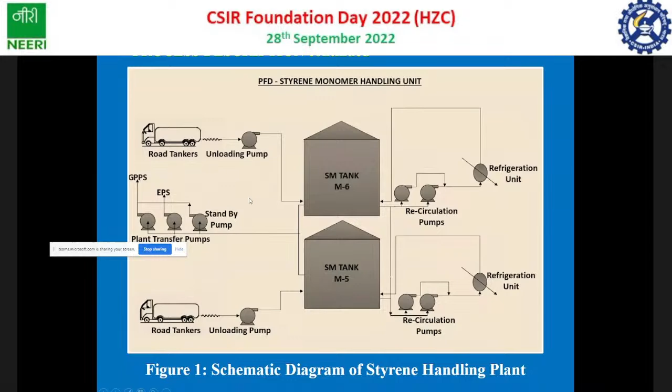Circulating pumps from the unit are located beside the tank. From the tank, styrene was being pumped to produce general purpose polystyrene and expanded polystyrene. That is the picture of the styrene handling unit.

Now let us see the top of the M6 tank through its two vents, where the vapor release happened. One is an 8-inch vent - that's the first one. The second one is at the center; it is a vent originally designed as a flame arrestor, but it was being operated as a vent also. So there was an opening of 10 inches in the form of two vents.

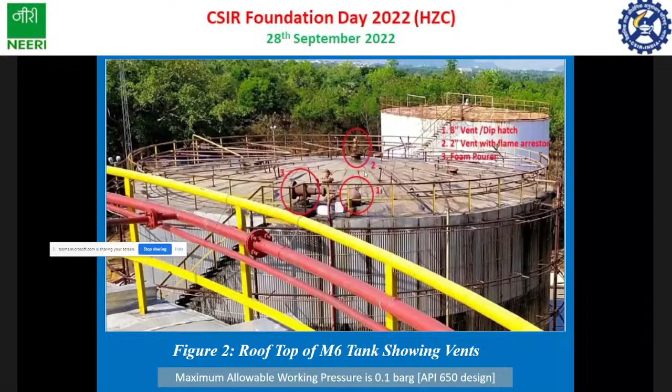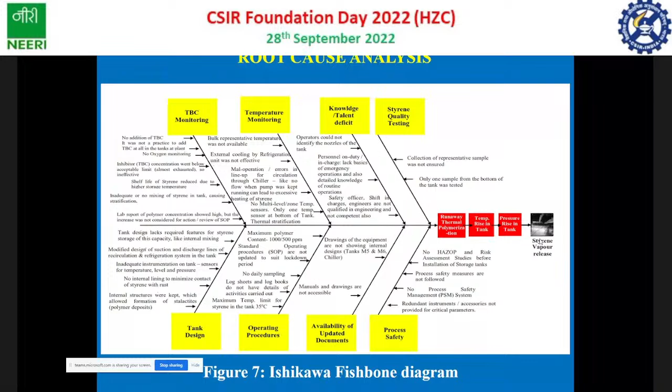Had it been adiabatic, then definitely the accident could have been huge, and the loss could have been huge. Luckily there were 2 vents, and they were enough to release the styrene.

So there are 8 major points we identified that influenced the increase of temperature of styrene in the tank. Those are tank design, tank temperature measurement and control, TBC monitoring, operating procedures, availability of updated documents, knowledge or talent deficit, styrene quality testing, and process safety management.

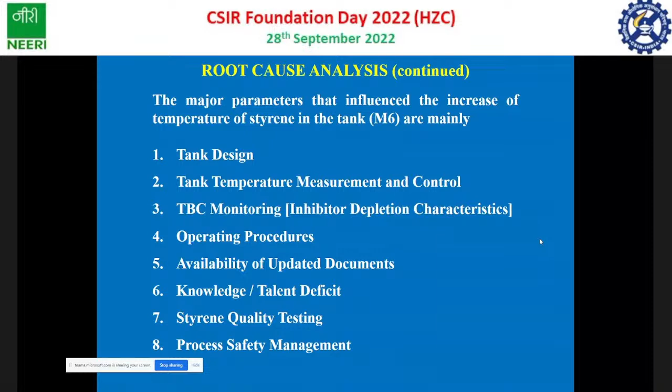Everything affected. All these parameters in detail we can go through.

Then we have the figure. This is one of the oldest figures I have seen. It is not exactly an engineering diagram, but a general figure, though there are several nozzles. It is one of the oldest because at the time of alcohol manufacture, this tank was fabricated for molasses storage. Later it was converted for storing styrene.

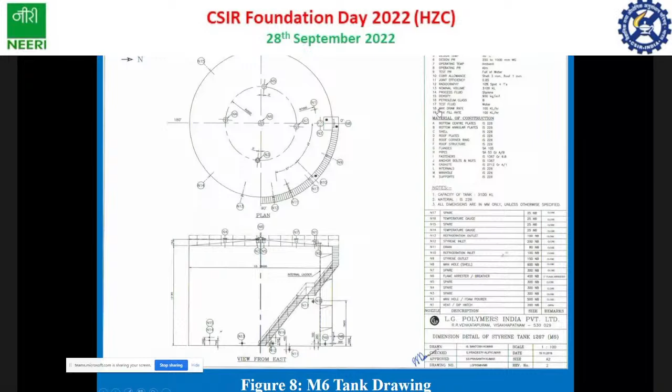So there were 17 nozzles. I told you about the flame arrestor, and I have shown the dip hatch as vents.

Another disadvantage of this tank that promoted the formation of polymer content was the conical roof on an inside structure. Actually it should be outside the structure. Modern designs won't permit having the inside structure. Then it was provided with a recirculatory cooling system.

Then the major thing happened, which was the change of design in the suction and discharge, as you see here. Originally it was having a swing pipe with float, such that the whole liquid, while being sucked, could be mixed.

The cold liquid, actually this diagram is reversed, coming from the refrigeration system, enters at the bottom, because bottom contents are taken for processing. So what they did, they faced some problems with the float, so they removed the float, and everything is now restricted to the bottom.

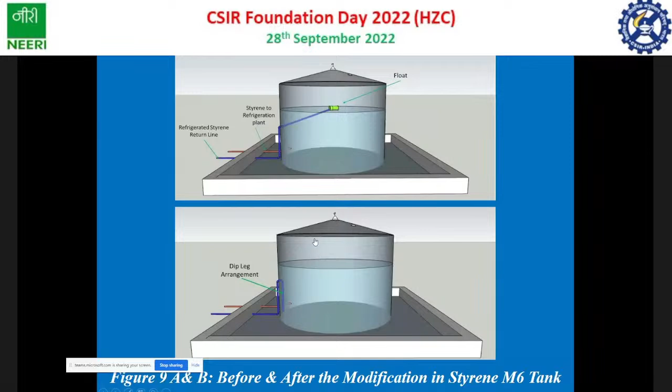So the remaining liquid happened to be stagnant. Because of this, the temperature of the styrene in the tank was not uniform, except the bottom zone. The top and middle zones were exposed to sun heat, and the temperatures went up during the corona period.

Otherwise, they were taking styrene from the shore tanks, and with a residence time of 1 or 2 days, it was moving to process plants.

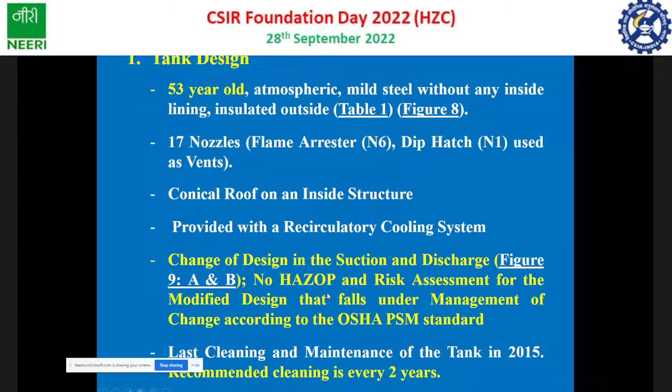The last cleaning and maintenance of the tank was in 2015. Recommended cleaning is every 2 years.

When we come to understand tank temperature measurement and control, there was a single temperature measuring probe at the bottom of the tank. At least 3 probes at different locations must be the minimum.

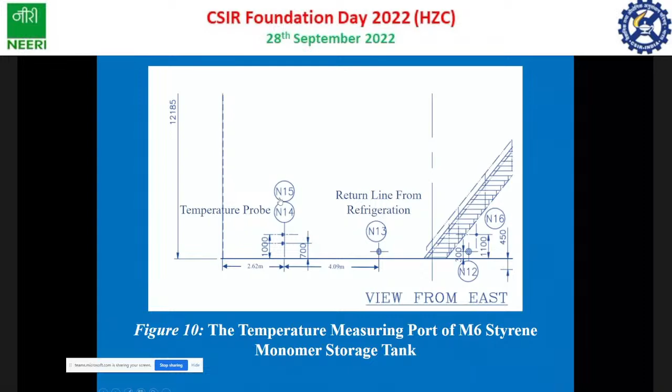So you look at the probe that is nearer to the wall, and it is not a representative actual temperature. Only bottom zone temperature was being measured; temperature measurement was restricted to the bottom zone. Top and middle zones might have had different temperatures that they never thought of when they changed the design in the suction line and discharge line from the refrigeration unit.

So there was thermal stratification of the tank. As you see here, with good mixing you have 17 degrees centigrade. Otherwise, thermal stratification occurs: above you have 35.2 degrees at the top layers, but only 17 degrees at the bottom.

The maximum temperature protocol of LG Polymers was 35 degrees, when we inquired with other companies it was far, far less. So the protocol itself actually created some problems, particularly when storage was for a longer time.

Tank top temperature was estimated at 41.7 degrees from DCS level percentage data, recorded on 28/4/2020, exactly 9 or 10 days before the accident occurred. This reflects the incorrect assumption of bottom temperature as the bulk temperature of the tank.

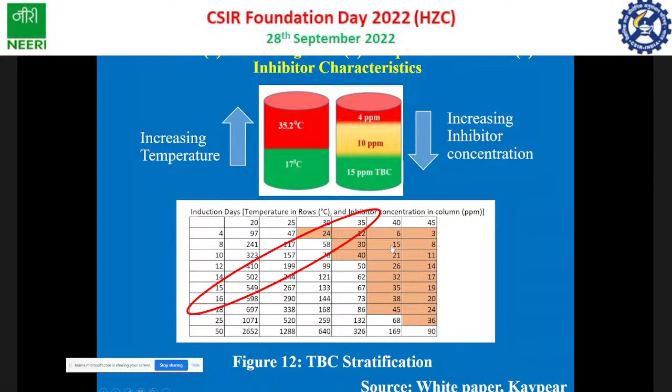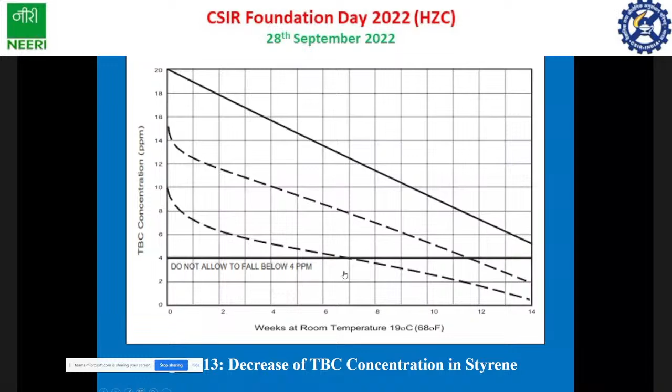Then there was decrease of TBC concentration in the styrene, because they did not know the inhibitor depletion characteristics. Look here at the diagram: it should not cross 4 ppm. I've shown you a figure where the top layer of styrene must have reached 4 ppm or even less.

Then mixing was not there, and they did not have any measurement facility for oxygen levels, so we could not find out the oxygen levels. If oxygen is less than a certain ppm, even maintaining 15.6 degrees centigrade, it will stay stable only up to 10 to 15 days. At 30 degrees, only 4 to 5 days.

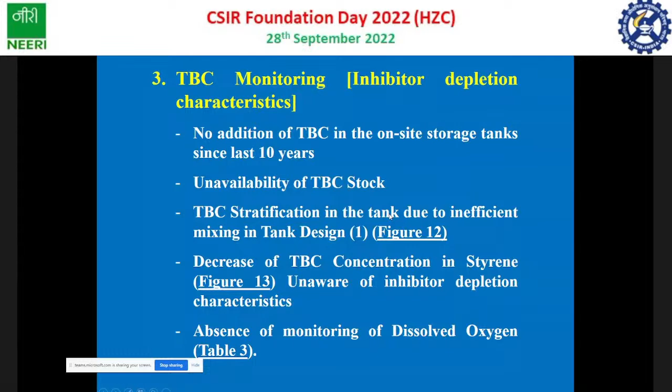Then, what are the lessons learned for tank design, temperature measurement and control, and TBC monitoring? These are the first major points. You'll see here, the tank should have this kind of design. The earlier design was good, but they changed it without thinking of the consequences.

You will see this suction pipe, called the swing pipe. It moves up while pumping and comes down, so all the liquid at various levels is recirculated through the refrigeration unit. So this kind of tank design is necessary, it should go back to that.

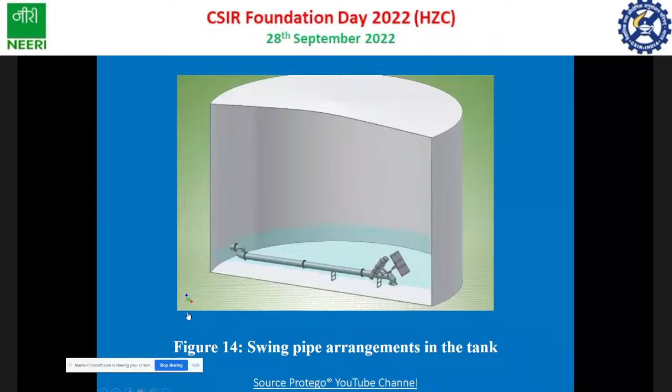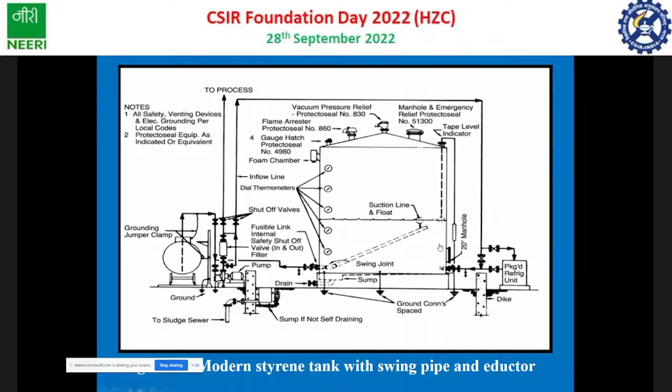Here's another figure showing the modern design of the styrene tank adopted worldwide, being the oldest tank where the accident actually occurred. You see the swing pipe here, shown in the discharge from the refrigerator line from the pump, where an eductor is located. The eductor is a mixer that mixes the contents well so that uniform temperature and uniform concentration of TBC are maintained. The tank must have a suction swing pipe and eductor system for efficient mixing.

The tank should have effective cooling systems with backup cooling, with a maximum temperature of 25 degrees, but personally I think it should be below 20 degrees centigrade. The number of nozzles in the tank should be kept to a minimum required. The material of construction can be carbon steel with coating inside, but the old tank did not have the coating, even though they claimed otherwise, there was no proof.

The roof of the tank should be supported with outside structures. Otherwise, stalactites form - lumps of polymer formed because of condensation. Vapor at any temperature will be there, and it's a two-way process: vapor enters while the temperature cools during nights, then it is devoid of the TBC, promoting polymer formation. That is why the roof structure should be supported with outside structures, not inside structures, otherwise the polymer lumps fall into the styrene and may promote further polymer formation.

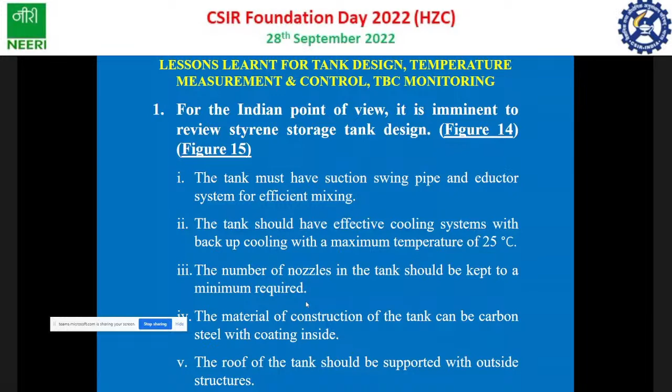A rust-resistant inorganic zinc silicate material should be used to coat the tank and nozzle internals, particularly the inside bottom of the tank and the lower 2 feet of wall, to prevent hazards from static electricity. Rust and moisture should be excluded from styrene storage and handling facilities. The outside of the storage tank should be painted white or aluminum.

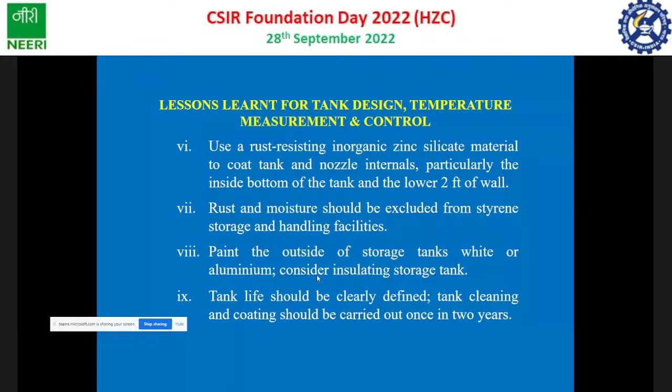The manufacturer should consider insulating the storage tank - of course, this tank was insulated. The tank life should be clearly defined. So at 53 years old, it needed demolition and construction of a new tank, but unfortunately the accident occurred. Tank cleaning and coating should be carried out once every 2 years, while they were doing it every 5 years.

So let us see how operating procedures impacted and led to the accident. Maximum polymer content - they said at one time 500 ppm, at another time 1000 ppm. Both are found to be wrong, because it cannot be more than 100 ppm. To be strict enough, we can allow only 10 ppm.

Standard operating procedures were not updated to suit the lockdown period, so there was no daily sampling. Log sheets and log books do not have details of activities carried out. The maximum temperature limit for styrene in the tank was set at 35 degrees - it should be at least 25 degrees.

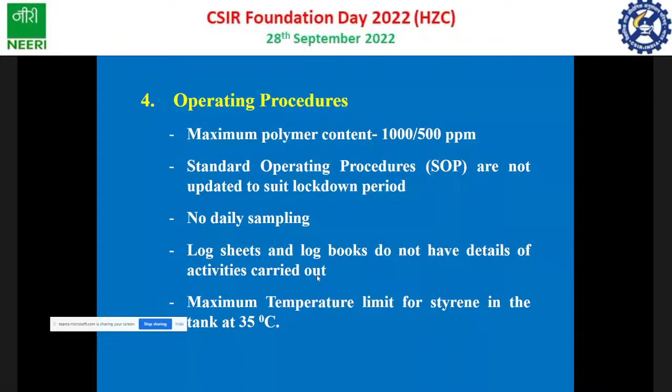So what are the lessons? Standard operating conditions with upper and lower limits of each parameter need to be carefully reviewed. High critical standard operating procedures should be in place if high polymer content is observed. Unfortunately, management did not take any action when high polymer content was observed at nearly 450 ppm. Understandable, usable, clear and concise logbook entries are good practice as part of operation discipline. Sampling frequency should be increased when the process is dormant, particularly during pandemic conditions.

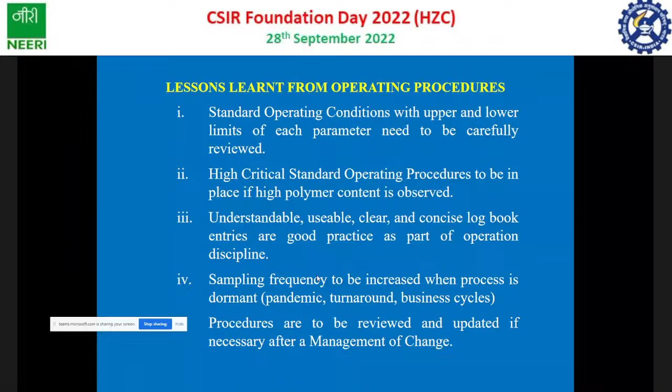Procedures are to be reviewed and updated if necessary after a management of change, which they hadn't done. Then there's availability of documentation also - nobody, actually most of the operating personnel, was getting access to the documentation. We also did not get access to the documents. Procedures and manuals were not available during the time of the investigation.

Tank drawings do not show internal arrangements. I have shown one drawing - that is the only drawing available for the M6. Validation of the refrigeration system was unavailable. A paucity of basic process safety information was observed. Process safety information is the foundation for a process safety management program, and of course, they did not have the PSM program.

Knowledge or talent deficit also caused the accident. Operators could not identify the nozzles of the tank. Personnel on duty lacked basics of emergency operations, both on-site and off-site. There was no siren even after the accident - immediately after the accident they should have blown the siren, but they did not do that. Personnel were unaware of detailed knowledge of styrene handling and storage best practices.

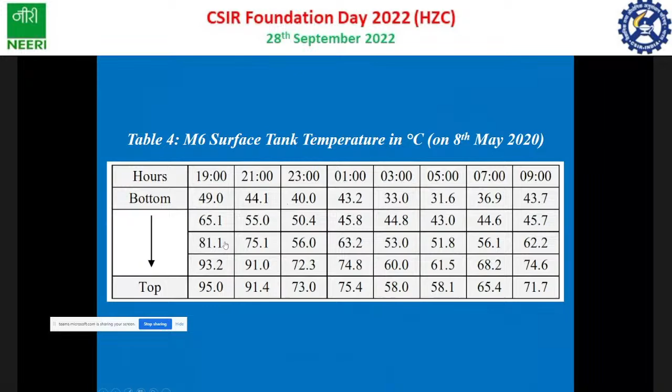Most of them were saying, even their operating personnel, that it was not because of thermal polymerization. We had to show this. Then why was there a temperature profile in the tank?

Look at figure 16. How the bottom temperature originally was at about 17 degrees to be precise. The styrene from the top layers was being polymerized, and by the time it reached the bottom, the temperature had risen to 160, beyond the boiling point, but pressure was present.

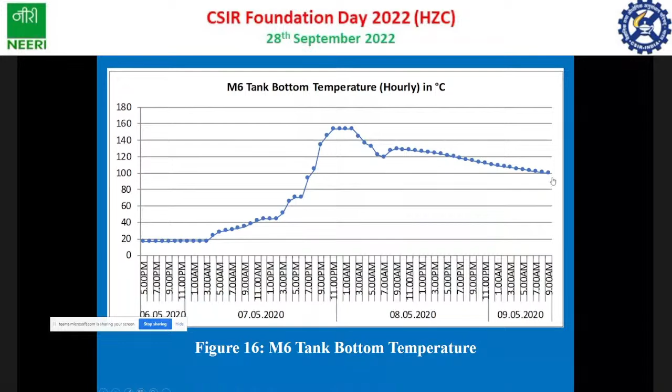According to that pressure, the boiling point had risen. Then, because of some interventions to suppress the reaction, the temperature came down. Even on the 9th, it was 100 degrees centigrade.

The top layer of the tank was condensed styrene without TBC. Temperature above 35 degrees centigrade, but estimated 41.7 on 28/4. Then the runaway polymerization reaction started at about 34 degrees centigrade, according to Harold G. Fisher, an expert on this.

Styrene self-polymerization reactions - he is an expert on reactive hazards. He had made simulations and sent one simulation. Our observations actually coincided with the simulations done by Fisher.

Hui and Hamielec kinetic models are valid between 100 and 200 degrees centigrade, mostly for polymerization reactions in reactors. So Kaypear shared this information.

Then, it is non-adiabatic. That is why so many other people were saved and the whole area was saved. Volumetric vapor generation due to the heat of reaction balances the vent rate through relief devices.

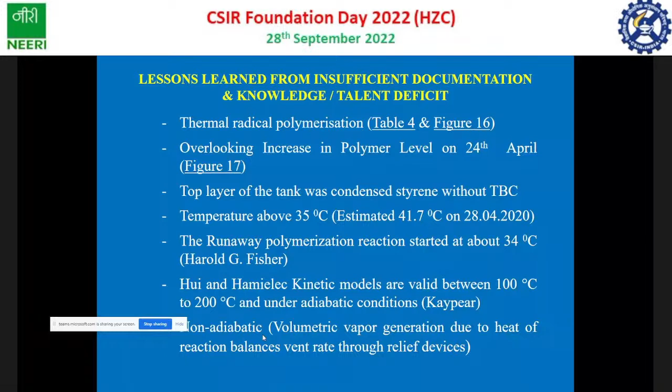Styrene quality testing - collection of a representative sample was not ensured. Only one sample from the bottom of the tank was tested, and that too periodically.

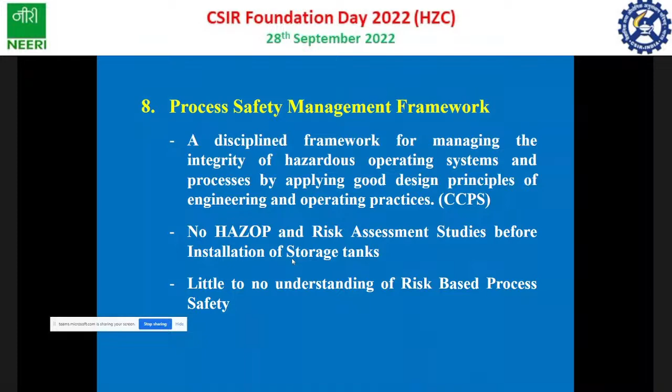The last but not least parameter is process safety management framework - a disciplined framework for managing the integrity of hazardous operating systems and processes by applying good design principles of engineering and operating practices, according to CCPS. There was no HAZOP and risk assessment study before installation of the storage tanks, and little to no understanding of risk-based process safety. That also became a factor.

In conclusion, technology and techniques should be continuously updated. Continual learning and keeping the equipment in good condition should be ensured. Senior professionals responsible for guiding should have adequate experience and should ensure strict compliance with standard operating procedures.

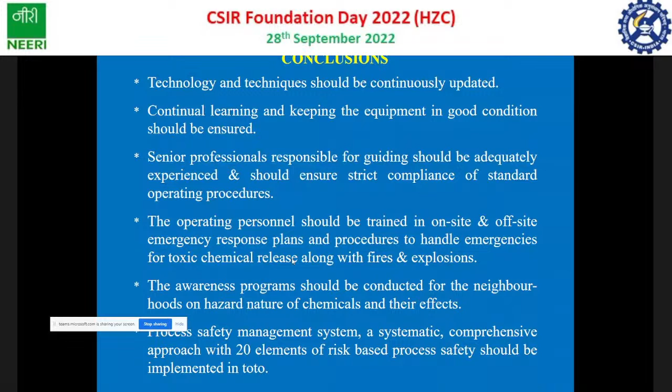Operating personnel should be trained in on-site and off-site emergency response plans and procedures to handle emergencies for toxic chemical releases, along with fires and explosions. Awareness programs should be conducted for neighborhoods on the hazardous nature of chemicals and their effects. A process safety management system - a systematic, comprehensive approach with 20 elements of risk based process safety - should be implemented in toto.

Finally, I acknowledge my grateful thanks to the Government of Andhra Pradesh and the High Power Committee on the LG gas leak, especially to Sri Neerab Kumar Prasad, IAS, Special Chief Secretary and Chairman of the High Power Committee, for giving permission to make this presentation. Sincere thanks to my co-members of the technical committee, Professor VSRK Prasad, Director IIPE Visakhapatnam, and Dr. S. Bal Prasad, Professor of Civil Engineering, Andhra University College of Engineering. Special thanks are due to KPR Consulting, Chennai, and Harold G. Fisher for contributing important technical information to the technical committee and high power committee.

There are several references. If you have any questions, you can mail me at profkviro@gmail.com, or otherwise you can get it from Dr. Basha. I have taken a little bit more time than planned, so my apologies to the organizers. Thank you very much.

Thank you, sir. It was very informative, sir. Thank you, sir.

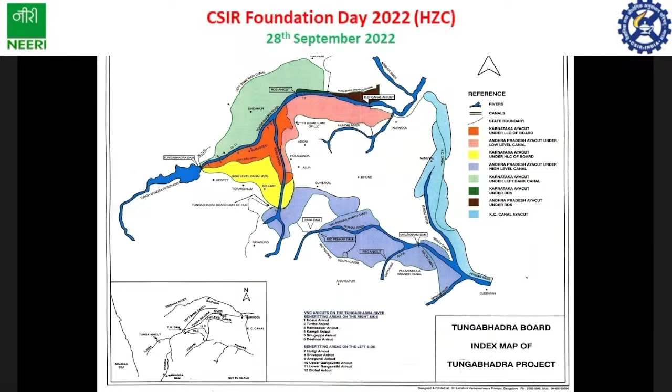What exactly is water management? Every year, sometime in May, the engineers of Telangana, AP, and Karnataka will sit and decide how much water is likely to come next year, because they have 75 years of data on how much water has come at this point.

So they assume this year some amount - say 200 TMC will come, based upon the analysis. Then, what is our intent? How much do you want this year? Because some years will be less, some will be more.

So they will ask how much Karnataka wants, and which canal they want water in. Not all can get water, but they have to give their intent. Then they will prepare a working table.

Because what happens is, when so many players are there, suppose one canal is at a lower level and one is at a higher level - if the lower level canal draws a lot of water, then the higher level canal, the one going to Anantapur, its level will fall.

They can't draw the water then. So you have to tell in advance when you want to draw water, so that others can use their share of water before others draw.

So basically the idea is this board will distribute the water - prepare an estimate for the year, then prepare the working table, then operate accordingly.

These are the canals, right bank low level canal and right bank high level canal. These are our jurisdiction, about one is 270 kilometers, another is about 100 kilometers.

Basically, roughly, this dam supplies about 130 to 150 TMC of water, variable, for irrigation, and about 13 TMC for drinking water to about 1 crore people in that area - Ballari, Uppla, Kurnool, Anantapur.

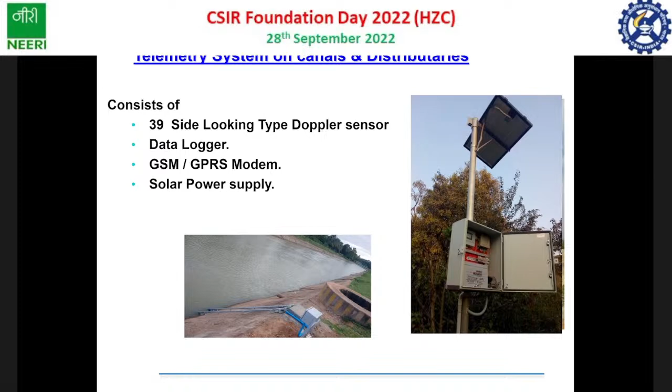So we implemented it all along the canal. This really helped with transparency. Some distributaries and farmers were taking 400 cusecs of water but thought it was only 200 cusecs. When we showed them with this telemetry what is actually going, they realized it was mismeasurement. The upstream fellows dominate and the tail-enders don't get water, so they open it much more. After implementation, they understood it was mismeasurement - we are giving water correctly, they were mismanaging it. So there has been a lot of improvement.

Now, if there is rain in the catchment or in the command, we stop the water because we know - we are sensing all these things. So farmers are very wise now. They can see the website, they somewhat know the dam position and canal position, and they can decide what crop they want, or if it's illegal. They know if water is not there in the dam, they will not have a crop. So a lot of wisdom has come to the farmers.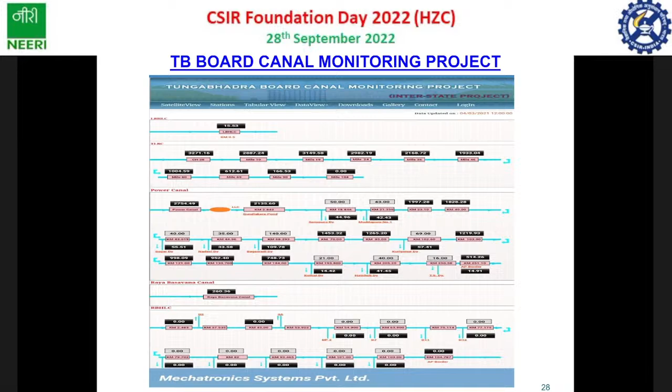Politicians don't believe this because a lot of theft was there. They were taking 4,000 cusecs but recording only 2,000 cusecs. After we installed the meters, they were taking 4,000, but they still weren't believing it, insisting they were taking only 2,000.

Some politicians and MLAs came, so we showed them the technique, but they would not believe this technique. They said they want only the current meter. I said no, you have to use the latest technology, it's very accurate and simple. But the ex-MLA said no, he was opposing, doubting whether it was really 4,000 cusecs.

It is very accurate. Normally this canal takes about 4,500 cusecs, feeding about 4 lakh acres, but they were only recording 2,000 cusecs because water wasn't reaching the tail end. All the upstream products were drawing more water, so just to hide the fact they were telling 2,000 cusecs, saying they weren't getting water, but actually they were getting 4,000 cusecs every day.

After that, there was a big fight between the upstream and downstream products, because you have been cheating us for so long, for so many years.